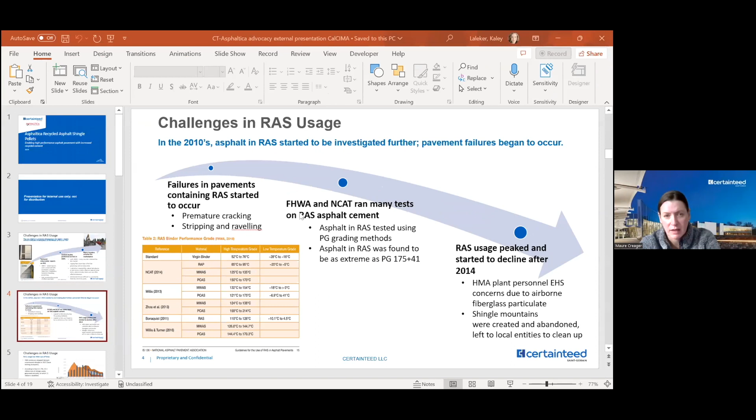Okay, are you seeing it now? No, I saw you click the presentation mode, but it kept it on the slide deck section and not the slideshow. Okay, does it work if I just do it like this? Is that big enough for everybody to see? I think so. Okay, sorry about that. I'm not sure what's going on with that. But anyway...

Fast forwarding then to the 2010s, we started to see some failures in pavements that had included RAS, and primarily premature cracking was the concern. So there was more research done by Federal Highway Administration, NCAT, and others, and they looked at the PG grading of the asphalt extracted from the RAS and found it was as extreme as 175 plus 41. So obviously that lower end was being significantly impacted by that aged asphalt. Because of this, the Federal Highway Administration, I believe in 2014, sent out a memo warning about this to the state DOTs. And so the use of RAS started to decline as a result.

And as it declined, there were other issues that arose. There were some concerns at the HMA plants about handling the material with the ground shingles, from a standpoint of airborne fiberglass. And then also as usage declined, there were a few high-profile instances where there were large stockpiles of shingles left at recyclers and abandoned, and had to be cleaned up by local authorities, which again turned opinion against this use.

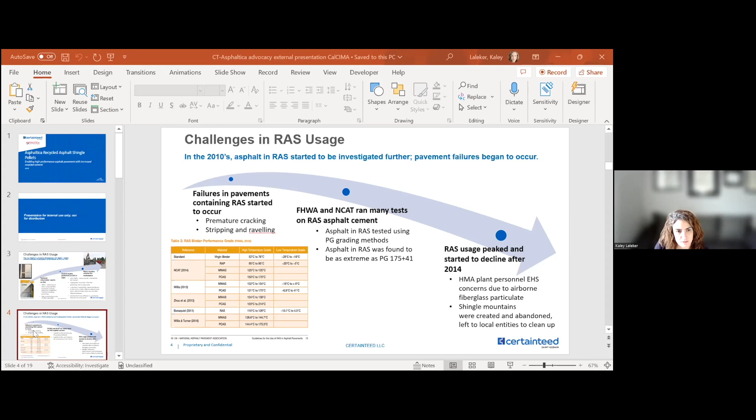So the result of this was that usage has fallen out of favor to a large extent. A lot of producers stopped taking in unprocessed shingles. And you can see this in the estimates of the tons of RAS used in hot mix asphalt declining. In 2014, it was almost 2 million tons in the US, and then by 2021, that was down to 630,000 tons.

In comparison, the amount of shingle waste generated annually is about 15 million tons. And the majority of that material—the asphalt cement and the other resources that are part of those shingles—is being wasted. So the goal is really to figure out how you recapture that material without having these problems that affect the quality of the pavement.

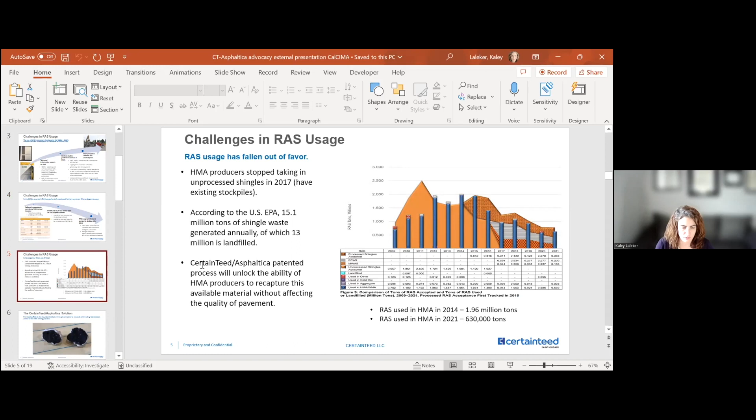So that's the kind of challenge that the Asphaltica process is addressing. The key to the process is that it pre-treats the RAS. Rather than the traditional way of doing it, where you'd add the ground shingles and possibly a rejuvenator directly into the hot mix, where that mixing process occurs in a matter of seconds, this process treats the RAS over a period of days within this protected pellet. That allows the asphalt content in the RAS to be sufficiently softened beforehand, before it's ever added to the mix, so that it can then blend effectively.

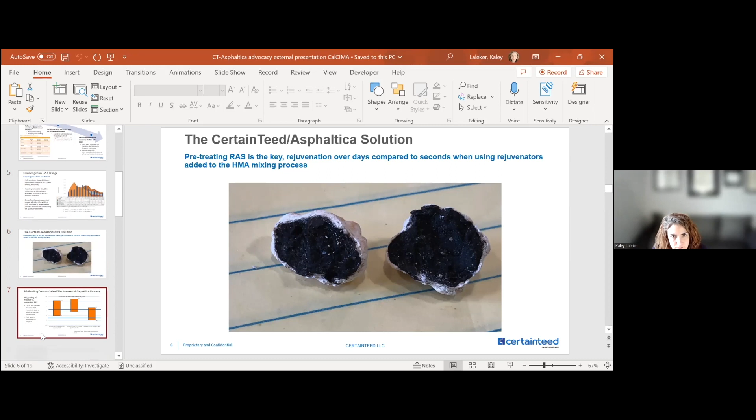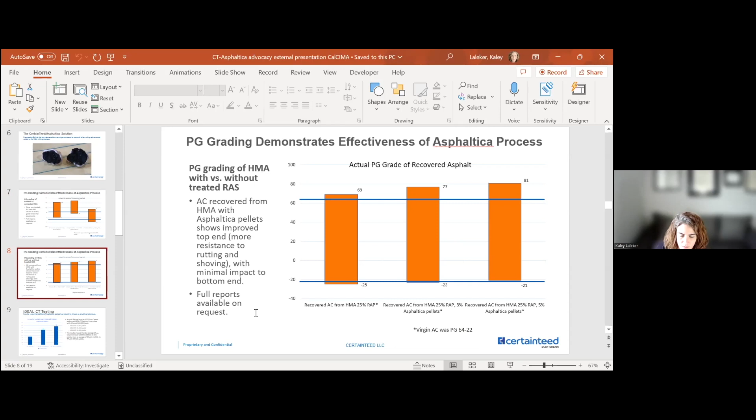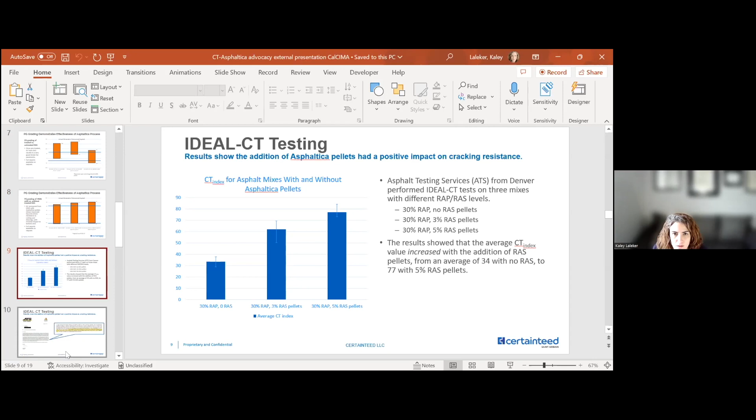This is just showing the report from that testing. This is a very interesting result because it shows that the cracking resistance actually increases with the addition of the Asphaltica pellets.

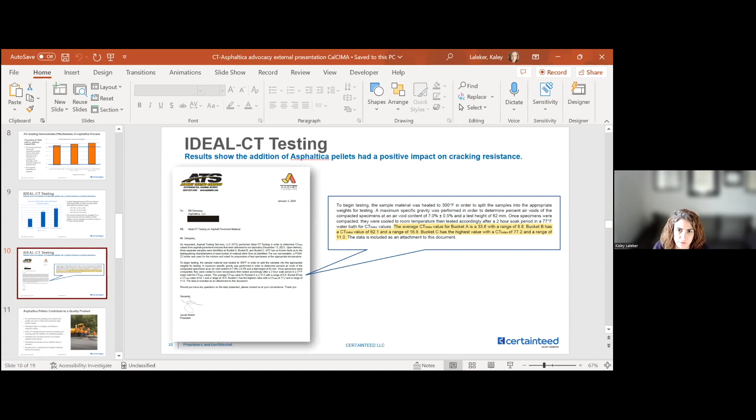So, to kind of recap what we found about the effect of this process on the mix: the PG grading confirms that this is a process that does result in better blending, and the pellets are actually contributing high quality binder to the mix. The shingles contain fiberglass fibers, which contribute to reduced rutting. And then IDEAL-CT testing showed improved resistance to cracking with the addition of the pellets. We also know that hydrated lime, which is the coating around these pellets, has been shown to increase asphalt performance.

The other thing I wanted to point out is that this pre-treatment process doesn't require any heat or solvents, and it doesn't require separating any of the components of the shingles. So the whole shingle can go in there. There's no yield loss.

In addition to these performance issues I've been mentioning, this process addresses some of the operational issues that have been seen with using RAS at the HMA plant. Pelleted RAS can be fed using the same type of equipment as RAP, which allows you to have a better, more consistent feed rate. I'll see if you can see this video that I'm showing that just shows you what it looks like when the pellets are being fed.

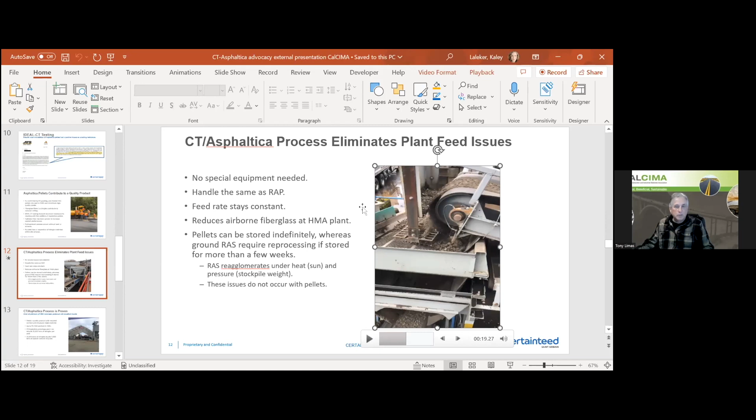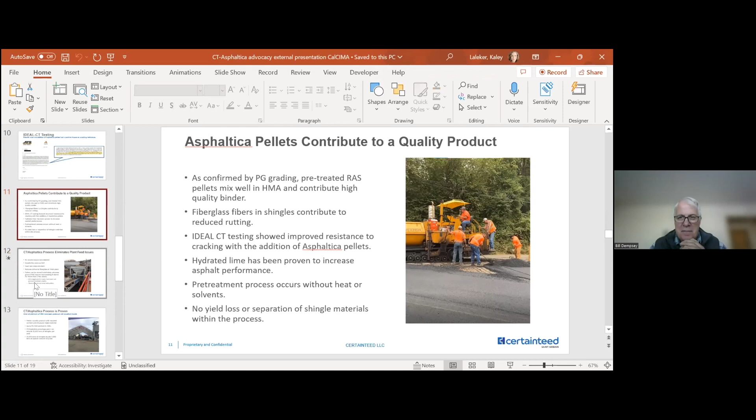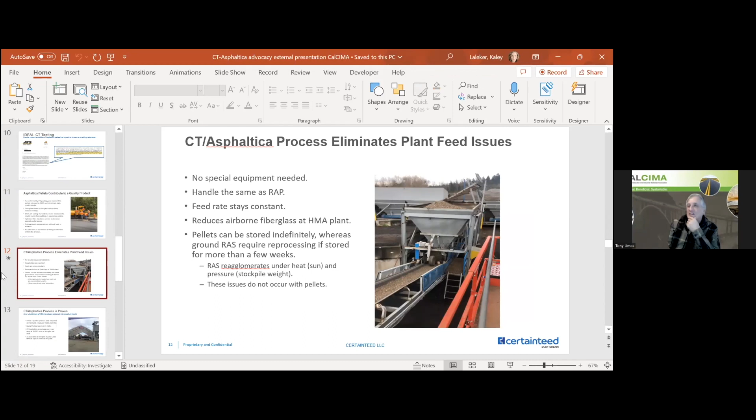What is the typical top size on it? 3/8, something, or... no, 3/4 minus. 3/4 minus? Okay. And going back to the previous slide, you mentioned hydrated lime, is that the coating? Yes. It seems like you might have some states that use hydrated lime might be okay with that. But, okay.

Okay, so obviously we're here because we want to expand the use of this process into California, but it has already been proven in other locations. There's been over 625,000 tons of hot mix asphalt produced using the Asphaltica pellets. They can be added up to 5% of the total mixture.

Just to give you a basic sense of the amount of recycled content that can be recaptured through this process, a typical plant could recycle 35,000 tons of shingles per year, and that would equate to about 7,000 tons of asphalt cement that's being recaptured and reused, displacing virgin material.

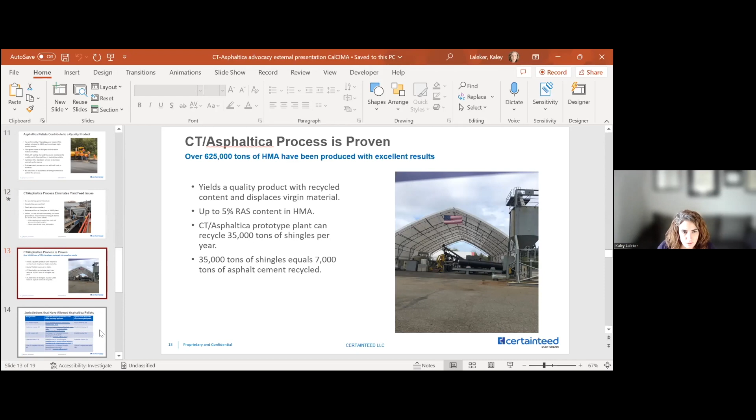So what we would like to see is, obviously for Caltrans, to develop standard specifications that allow for this use of pre-treated and pelletized RAS.

Another thing to mention in addition to the benefits I've covered is just the way that this fits in with overall policy objectives that state and local DOTs have. It enables the increase in recycled content in road materials, which is important from a policy perspective, and recaptures the value of the asphalt cement in these shingles that otherwise would go to waste. But most importantly, it does that while maintaining the same or better pavement performance.

So we are ready and willing to help provide any information or anything else that we can do to help with development of these specifications.

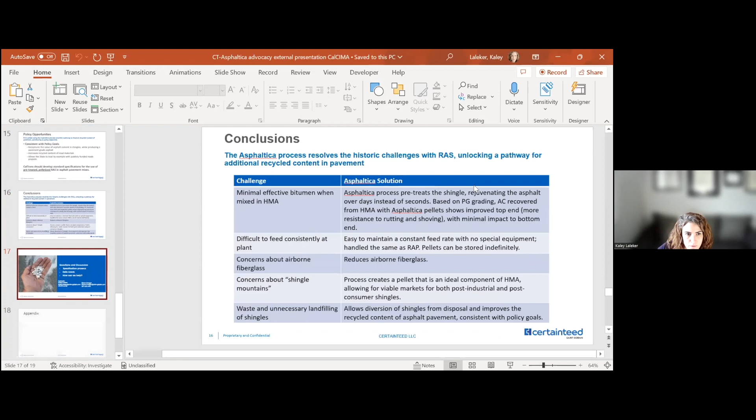And I believe that's it. So with that, I'm happy to take any questions. As Tony mentioned, we've got Bill and Maury here. Bill is the kind of technical expert, he's one of the inventors of this process, so he knows a lot about it. And we're ready to take any questions.